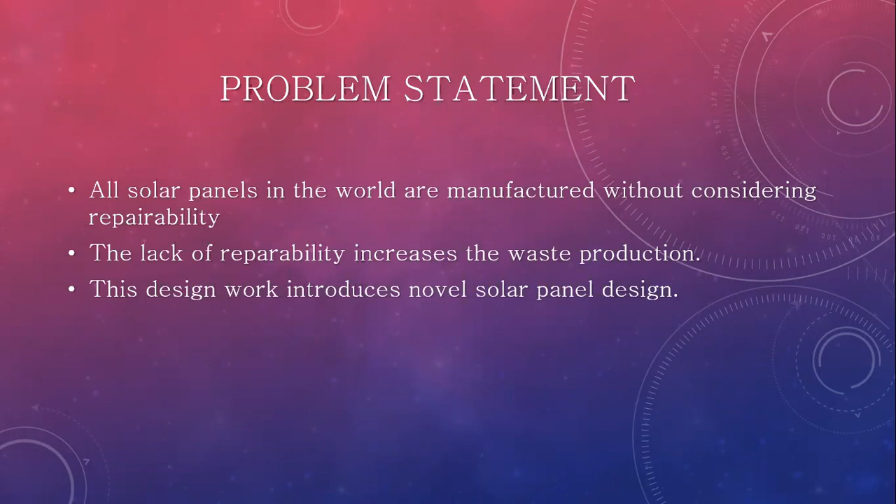We have tested our conventional modules under many conditions, and we found that the solar panels are not designed for any kind of repair mechanism. So we have to develop a new kind of solar module, which is financially more viable under certain conditions as compared with the typical modules.

Our methodology: testing, then designing, then prototyping. All module testing was conducted in the GCC lab. We started by testing the modules by applying a power test to measure the panel parameters, then applying a hail test with a different number of hail impacts to increase the damage, then detecting the cracks. After testing the panels, we found that a new design for a solar panel should be easy to replace in order to eliminate damaged parts of the system. We started with the modular designs and then improved the design over 2 prototypes.

I'll leave you with my colleague Abdul Malik Mukhaita to continue. Assalamu alaikum. Thank you, Muhammad. My name is Abdul Malik Mukhaita.

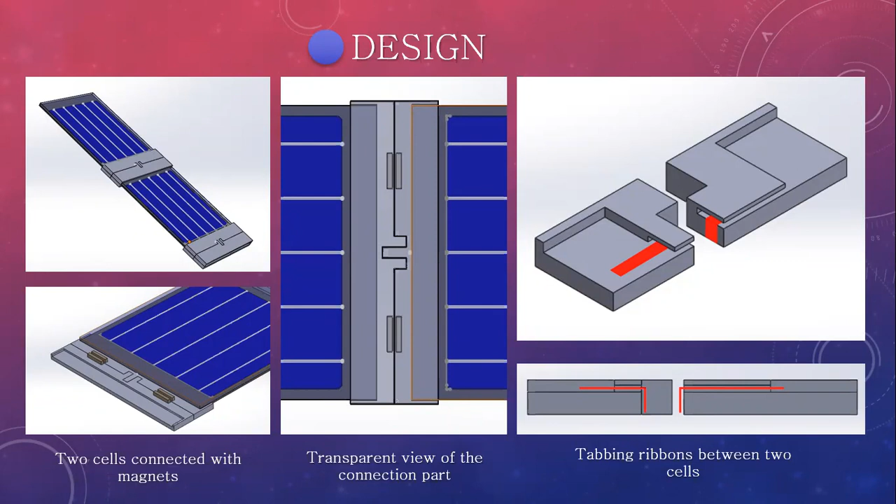The design includes 2 main elements: the cell unit and the connection element. The cell unit contains 3 parts: a top clear cover to allow radiation transmission, the solar cell, and at the bottom a thin rigid cover to hold the cell.

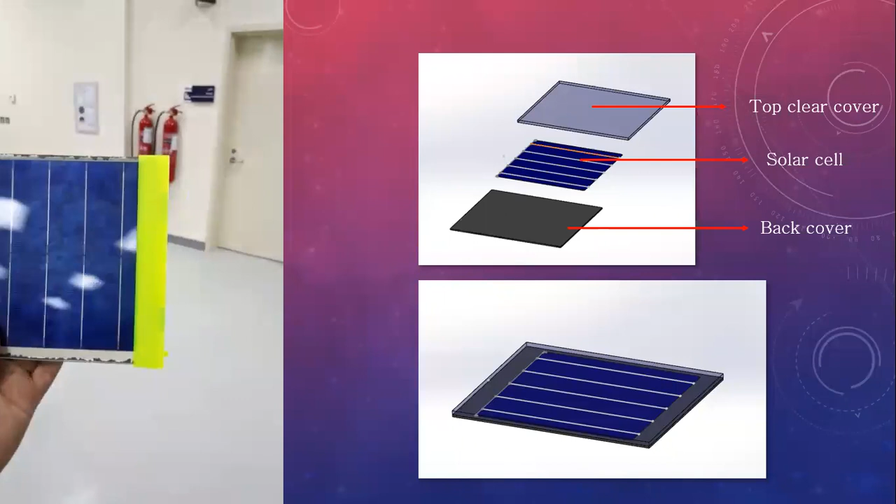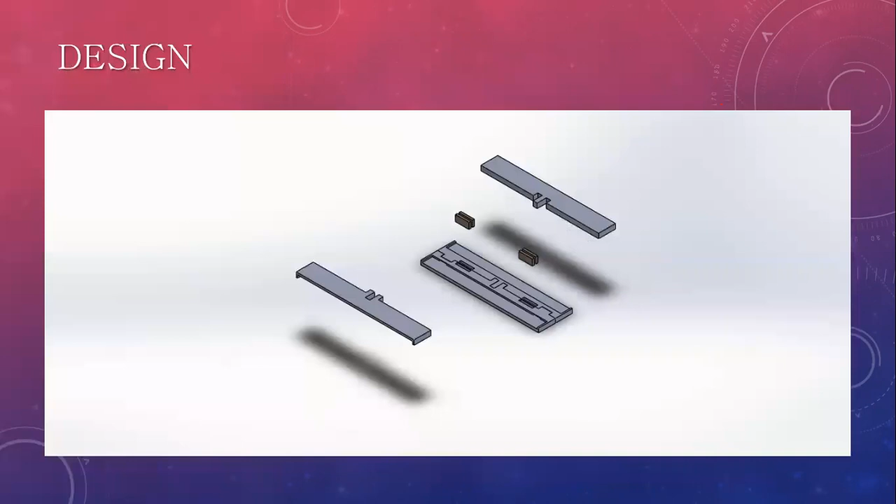The connection element consists of 2 parts that hold the cell assembly together from the top and bottom. Inside the connection, two neodymium magnets work as joining elements that hold 2 cells together. Between the 2 connection parts, a small notch is added for additional support against torque. The power transfer between cells happens through a tabbing ribbon that passes through a small groove in the connection parts.

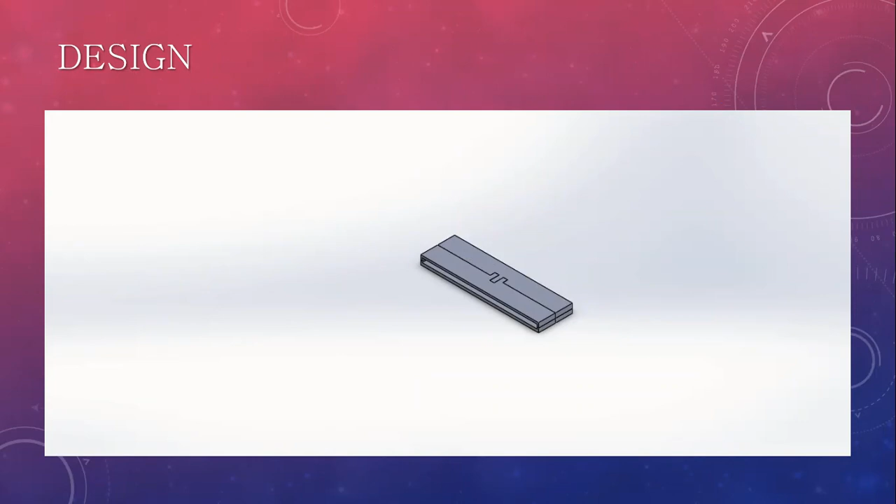The first prototype, the yellow one, faced a problem with a small notch designed to pass the ribbon to the next cell. We found that the notch was a weak point in the design and it broke easily if a small torque stress was applied to the parts. Keeping that in mind, the second generation was reinforced with a bigger notch and fitting element to overcome that stress. And I will leave you with my colleague Abdul Rahman.

To compare the lifespan of a typical solar system with a solar system based on a modular design, we need to take into consideration 3 main aspects: the material and cost, the damage cases that can affect the system, and the payback analysis.

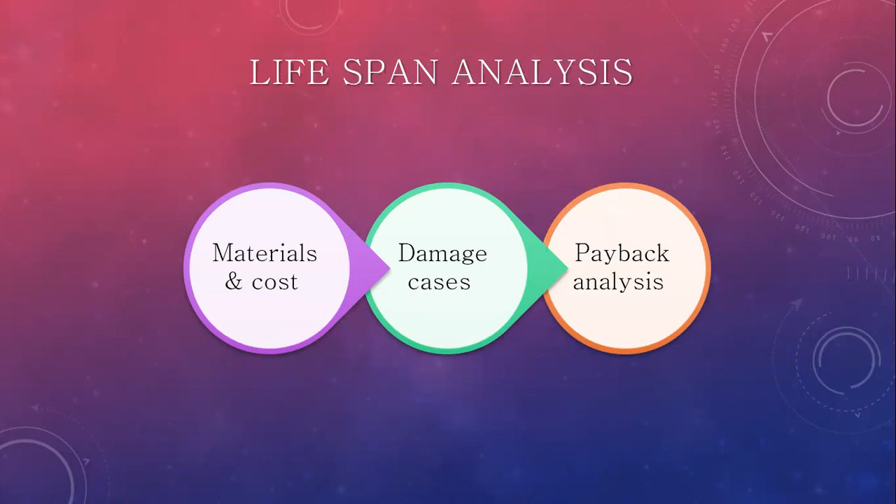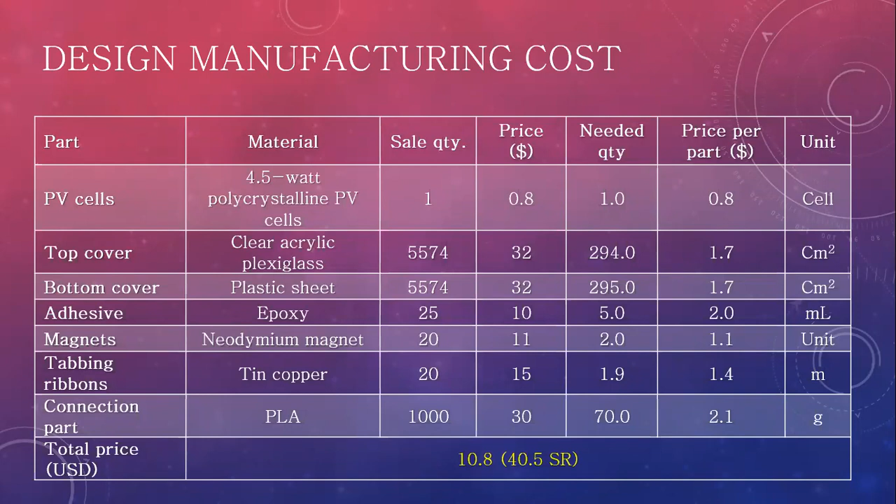Starting with the materials used to manufacture the design, most of the materials were locally available. The only material we needed to order online was the tabbing ribbons, as they were not locally available. After considering these materials, we found that the cost of 1 cell unit will be around $11, around 40 riyals, compared to conventional or typical solar modules, where 1 cell costs between $4 to $7 to make.

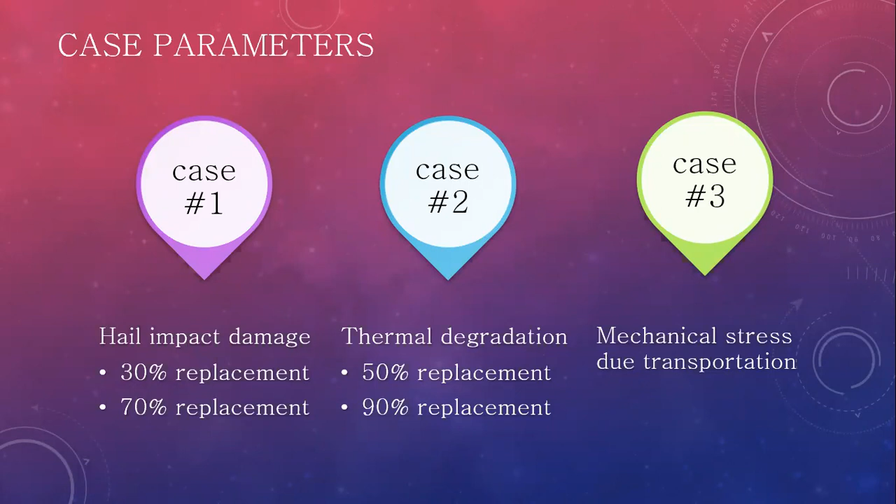We considered 3 cases that usually affect the performance of a solar system. First case is hail impact damage, with 30% system damage and 70% system damage. Second case is thermal degradation, with 50% system damage and 90% system damage. Last case is mechanical stress due to transportation between two locations, and this case is detailed in the report.

Starting with the first case, damage due to environmental factors such as hail impact. We considered a typical system that has 10 modules, each module containing 36 cells, to make an equivalent system based on a modular design, matching the power output of the system based on a typical design.

In case of 30% system damage, we will have 3 damaged modules with a total of 108 cells, and on the other hand, with a modular design, we will have only 3 cells damaged that need to be replaced. For a 70% system damage, we will have 7 modules damaged with a total of 252 cells to replace, compared to only 7 cells within a modular design.

The financial aspect of this case shows that we can save up to 95% in the replacement cost to restore the damage. Average solar module price is $250, compared to only $11 per unit for a modular design.

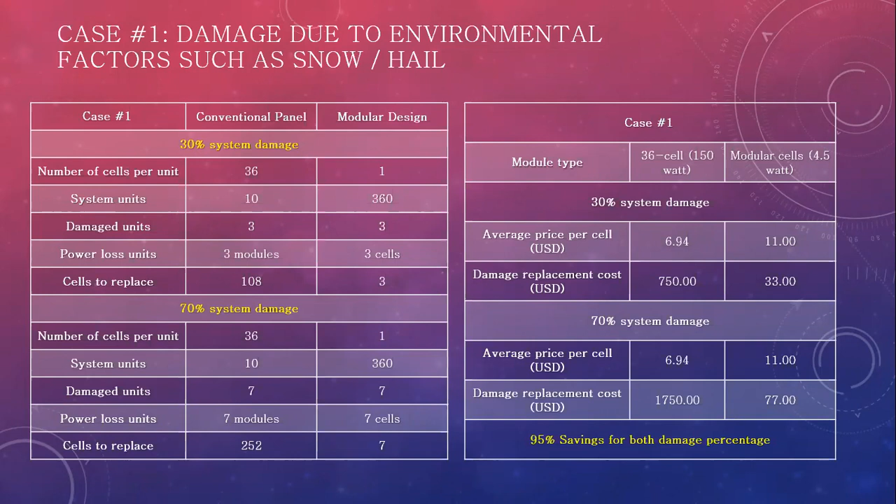The second case is thermal degradation. Thermal degradation is a condition that can affect cycling between high and low temperature during operating hours during the day, and in this condition, the solar cells, instead of generating electricity, dissipate the generated electricity in the form of heat.

In a 50% system damage, we will have a total of 5 modules damaged and a total of 180 cells damaged, compared to only 36 damaged in a modular design. In a 90% system damage, we will have a total of 9 modules that include 324 cells damaged and needing replacement, compared to only 36 cells that need to be replaced in a modular design.

We can see that both percentages, 50% and 90%, have 36 cells damaged in the modular design, but in this case the problem is that the damage is more scattered around the system.

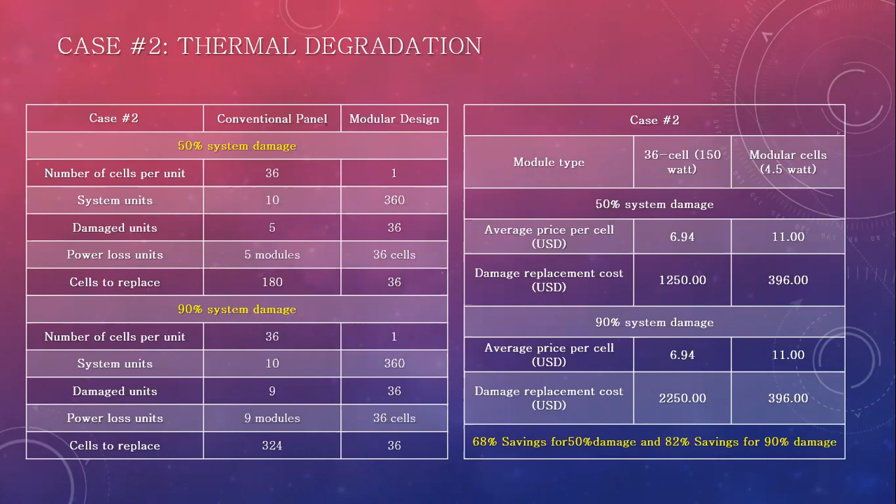The financial aspect of this case shows that we can save up to 68% in replacement cost for a 50% damaged system, and save up to 82% in replacement cost for a 90% damaged system.

Now we can summarize the main differences between modular and typical solar modules on three main aspects. The possible damage: the typical module will be completely damaged from one impact, whereas with the modular design, the impact will damage one area, and the damage will be contained to one cell area or disconnection.

The power loss on a typical module will be permanent and cannot be recovered. With the modular design, the power loss is temporary and can be recovered by replacing only the damaged part. The replacement pattern: in a typical design, we need to replace the whole panel, compared to only replacing the damaged parts on a modular design.

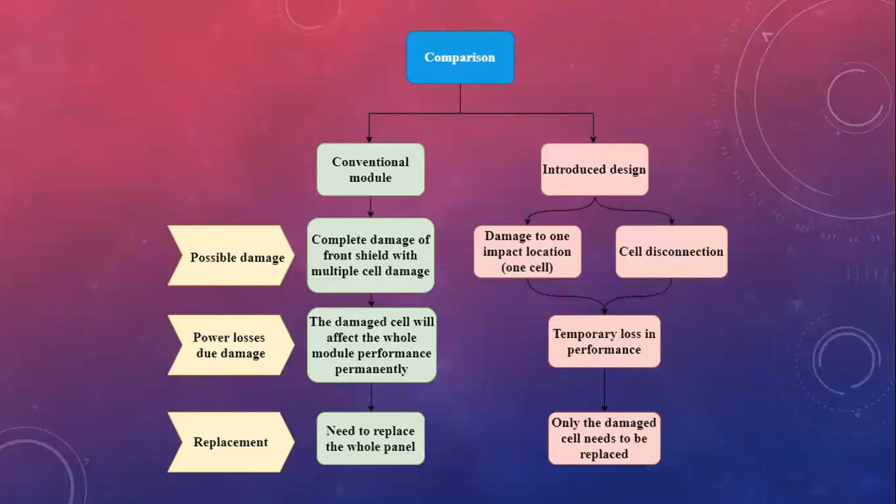In order to make both systems equivalent, we consider the following assumptions in the payback analysis. Both systems have the expected lifespan for a solar system, and the failure or damage will be introduced to the system at the midlife point, around the 12th year. Both systems will have the same power output, working hours, weather conditions, and billing rate. Finally, all costs other than the capital cost of the project are eliminated from this analysis.

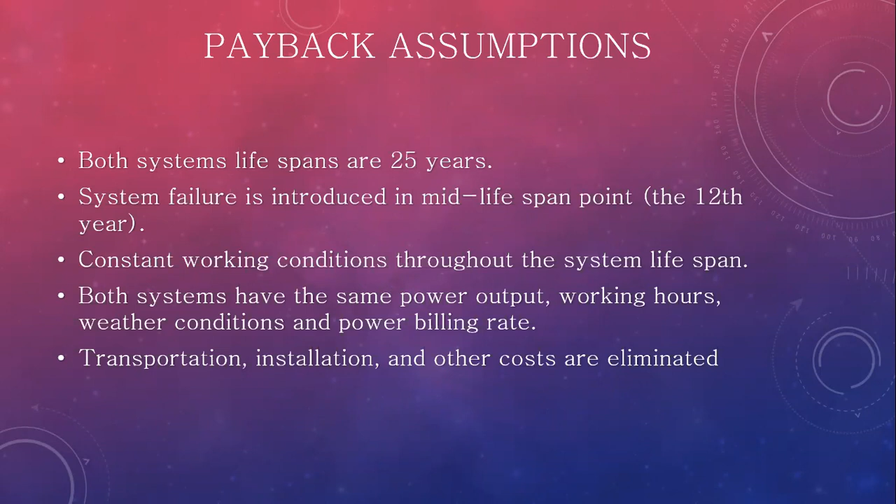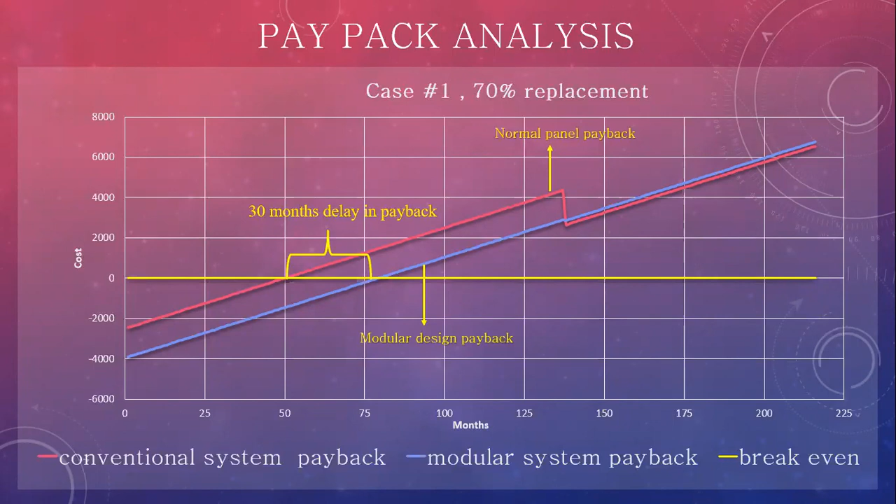In the first case, with hail impact damage and 70% replacement, we can see that the conventional system reaches the break-even point earlier than the modular system, due to the fact that the initial cost of a modular system is higher than a conventional system. But after introducing the damage into the system, we can see that the conventional system took a huge drop in order to recover from the losses and damage, compared to only a small drop for the modular system design. In this case, the modular system design is more feasible than the conventional design, because it introduces more profit during the following years after the damage.

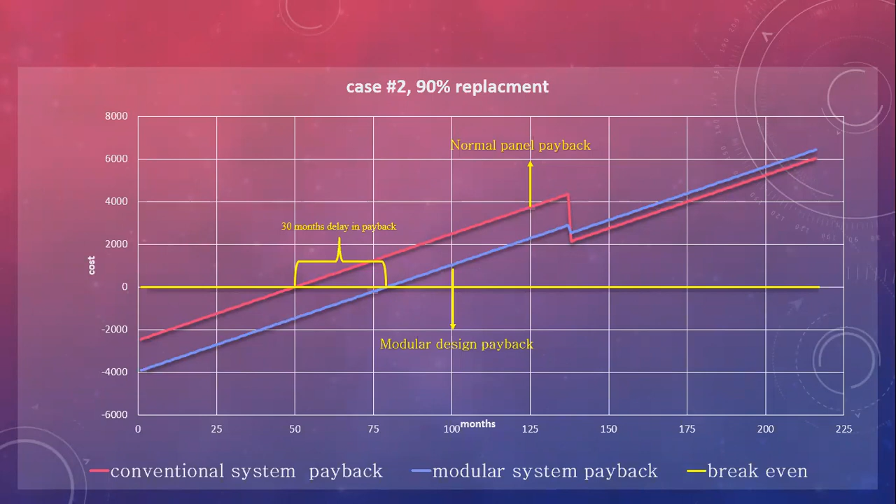The same applies for the second case, thermal degradation with 90% replacement cost. We can see that the conventional system reaches the break-even point earlier than the modular design, due to the difference in initial cost. But after introducing the damage to the system, the modular solar system recovers better than the conventional system, due to the low cost of replacement needed to recover from the damage.

And I will leave you with my colleague Mohammed Al-Qahtani to proceed with the conclusion.

Thank you, Abdurrahman.

In the conclusion, we introduce a new modular design for solar modules. The design is proved to control and reduce system damage, and it also reduces waste generation to the environment. The new design reduces the replacement cost, and with the reduced replacement cost, the insurance premium will be much lower. The modular design is financially more feasible in certain conditions compared with the conventional modules.

For future work, we need to conduct more experimentation, since we were not able to finish the experimental work due to COVID-19. Also, the selection of material is an important part of future work. And inshallah, we are aiming to apply for a US patent and submit a paper.

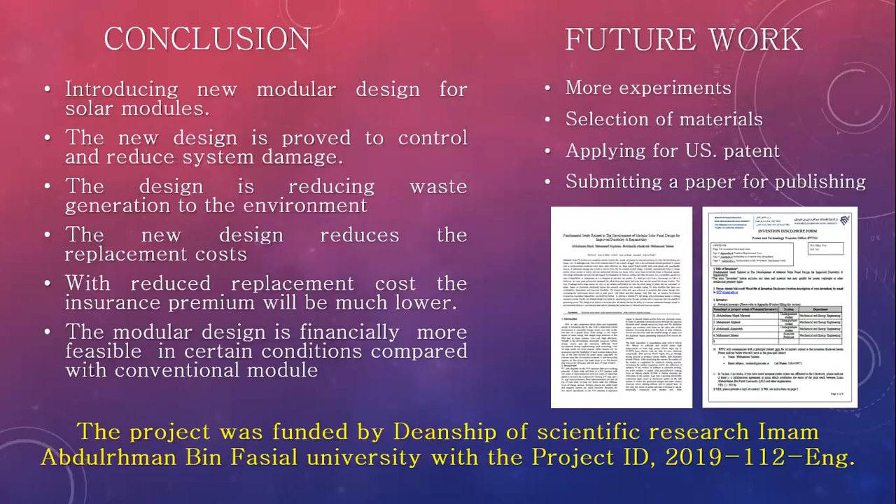This project was funded by the Deanship of Scientific Research, Imam Abdurrahman bin Faisal University, with project ID 2019-112, engineering. This project has been completed by satisfying all technical requirements stipulated by the university.

Finally, we want to express our thanks to the Deanship of Scientific Research and Imam Abdurrahman bin Faisal University, to Dr. Fahd Al-Amri, who helped us always, to Dr. Nasser Hariri, who guided us during the prototyping process, to Dr. Umar Siddiqui for his valuable advice, to Engineer Ijlal for helping us during the experimentation, and we were hosted by the DCC Lab. We would like to express our thanks, especially to Engineer Nawaf Al-Ahmed and Engineer Firas Al-Dosi. Thank you.

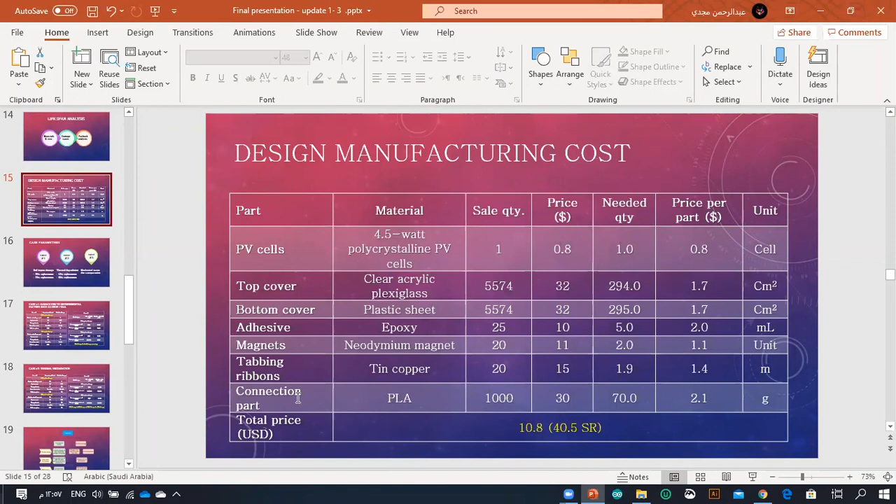Sorry for contributing before the jury members, but I will join also the comment of Dr. Nasser by going to slide number 21. Before everything, I would like to thank Majdi and all the group members for the great job and great work done during this senior design project, and thanks to their advisor, Dr. Salim.

Regarding the question, in the y-axis what I am seeing is labeled cost, but I think this is actually the cumulated cash flow cost. It shouldn't just say cost, because it makes the figure confusing, as happened with Dr. Nasser, because once you label it as cumulated cash flow cost, you can read the figure better and judge it better. My question is, I can see from this figure that the payback time for the conventional panel is exactly 50 or 51 months, however for the modular design the payback time is about 76 months, meaning the payback time for the conventional panel is shorter than for the modular design. This is my first comment.

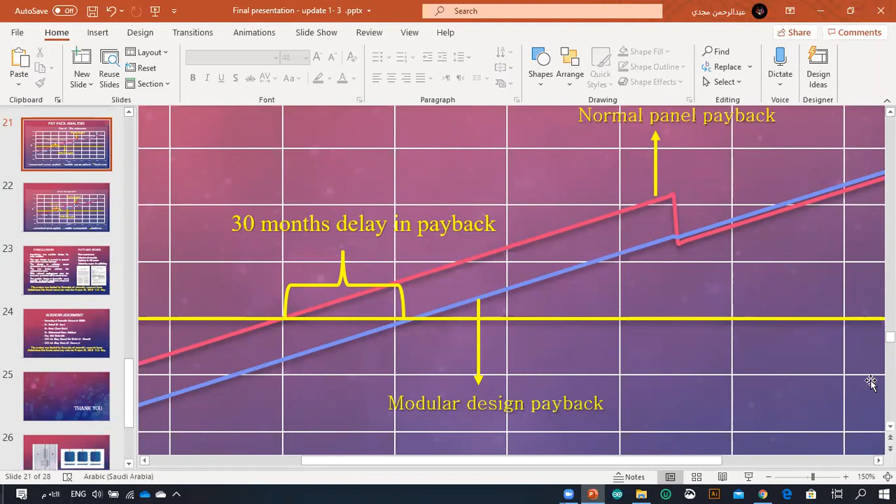Yes, again, thanks for all the members. I have my last question here. It's a very interesting project and very interesting design that came up. So let's go to the picture or the slide for the design itself.

Maybe slide 8. Yes. So my question is: is there any wastage or losses in the overall generated electrical power compared to the traditional modules? In other words, is there any waste in the overall area of the solar cells due to the additional gaps introduced in your new design? If you look at the normal PV panel, solar cells are very close to each other, and we don't have that introduced gap due to this design.

So now, as you build a module that consists of many cells, and compare your new design with the same area of your traditional PV panel, what will be the losses in power and electrical power of your new design? That will also come back to your payback chart again and affect it. So how much does that introduced wastage of area between the cells affect the overall power?

That's another criteria that can be investigated in the future of this project. But I just want to highlight it, and if you have something to comment on this, that would be great.

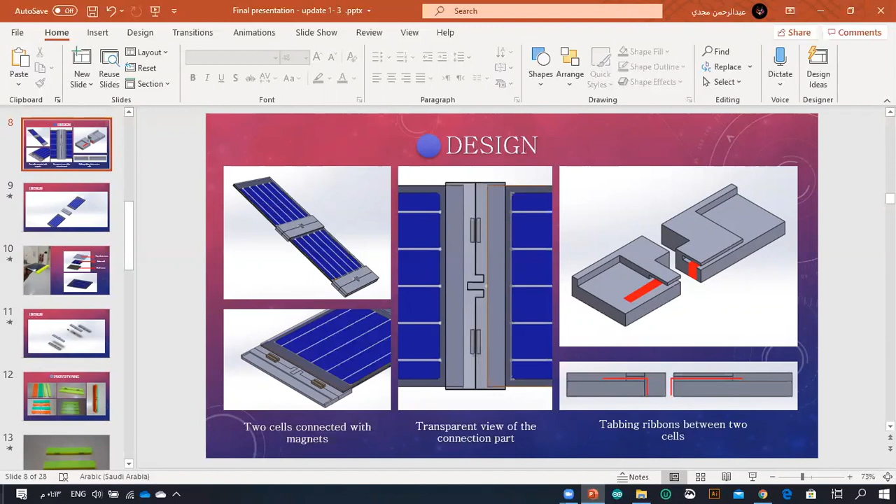the fact that we were not able to be on campus anymore. Great. My last comment is that you might need to compare the output of the electrical power of the new design after you optimize it and reduce that area with the traditional one, and then you can see how efficient your system is compared to the traditional one. We had that in plan, but we couldn't proceed with it due to the current circumstances.

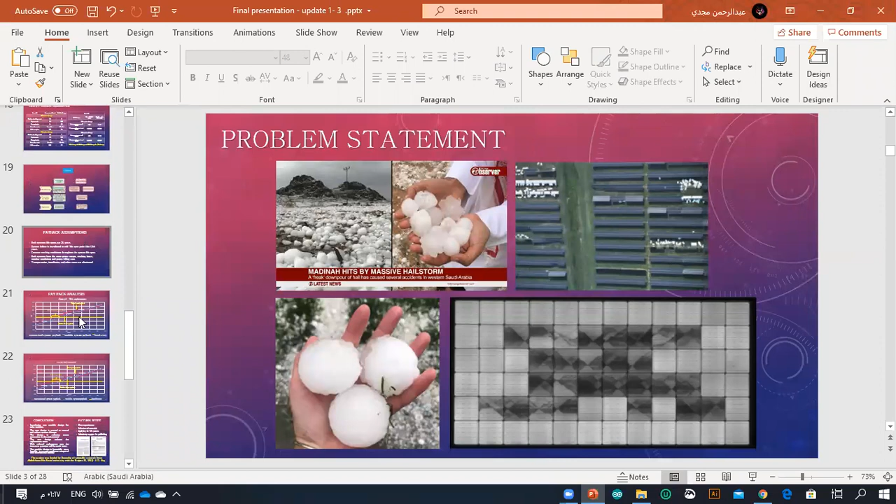Okay, my question was that you have introduced the damage only once in the life of the solar panel, right? Yes, that is correct. One-time damage. So if your damage happens more than once—for example, after repair or after replacement it happens again—then if you introduce more than one damage point, it will be more prominent how your system is better compared to the conventional system. Yeah, that's a very valuable point.

It's exactly what he's trying to say. Let me explain: in your case, you have introduced only one damage, and shown that your modular panel becomes more economically feasible compared to the other one. Imagine that on the same site there is a second hailstorm after one month—then again, in the case of a traditional panel you will have to replace the whole site, but in your case, again, very minimal damage. So when you have multiple damages on the same site, your solution becomes much more economically effective. In terms of larger, more frequent damage cycles, you become much better. That's what he's trying to say. Correct, sir? Correct, Dr. Zahir? Yeah, exactly. Thank you, Doctor.

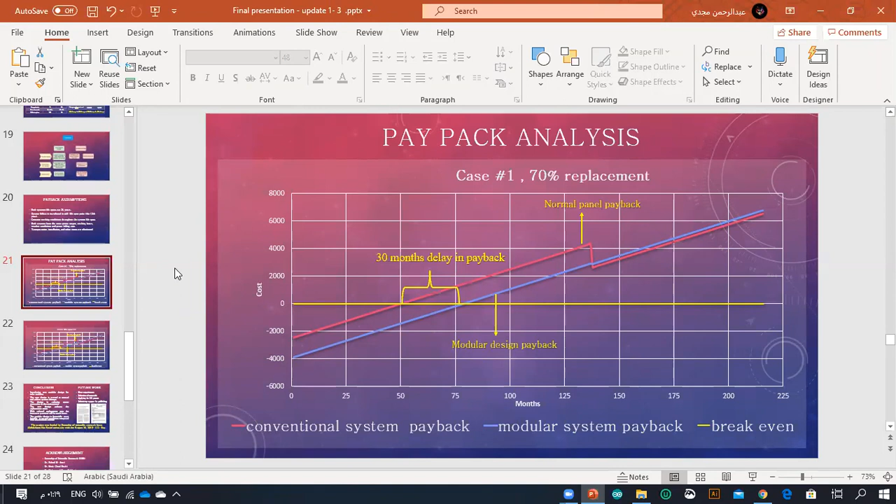Okay, thank you, Dr. Salim. First of all, this is a good project and the students have done a great job. But again, my concern is regarding what Dr. Nasser already mentioned about the power issues.

Students have mentioned that they don't have time to do the power calculations due to COVID-19, since they are not going to the university. But what about the initial calculations? In one of the slides you mentioned that with some crack the efficiency is decreased by 30%. Have you calculated how big the crack is, and according to that, how much the efficiency is decreasing? Did you do any analysis in the initial phase of when the efficiency actually decreases due to the damage?

We actually, in the beginning of this semester, conducted experimental work in the GCC lab where we took real panels and hit them with bolts to introduce damage to the module. Here we can see that with an increased number of hits, the power loss increases. These are the experiments that we conducted.

I will leave the floor for Muhammad if he can add to that. For the 30%, we were participating in some webinars, and there is a company evaluating the micro cracks outcomes. I meant, when there are micro cracks, how big is the decrease in efficiency? The expert was saying that it depends on the size of the crack, and it can reach up to 33%.

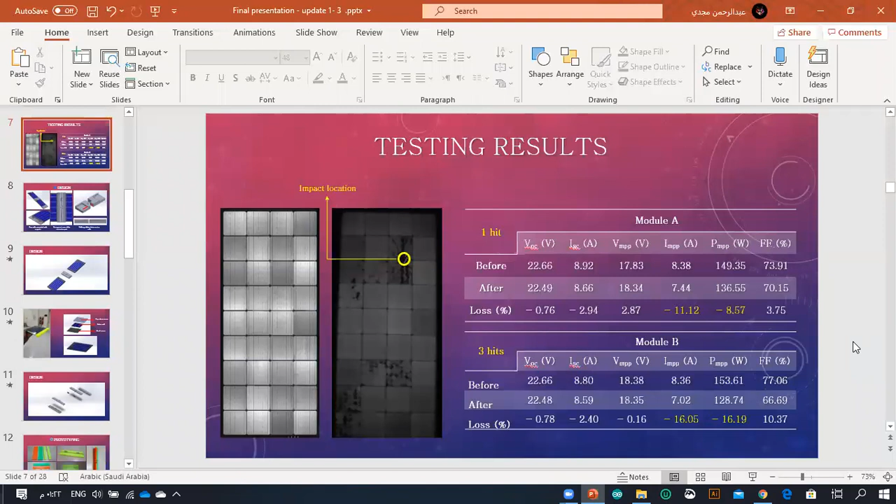The fill factor compares... Majdi, yes, please doctor, explain the whole table so that all the audience is clear, since it may not be clear to everyone. Make it bigger size and explain the whole table, please.

Sure. In the first table, the VOC, the open circuit voltage, and the short circuit current are the voltage and current generated from the panel with no load on it. In the other columns, the maximum point voltage and maximum point current are the voltage and current at the maximum power point that the panel generates, and multiplying these two values generates the maximum power point.

The fill factor is a term used to describe the performance of a PV panel by telling how much energy the panel can generate from the maximum possible energy that can be generated. This factor is a ratio between the maximum power divided by the maximum possible power, which is the multiplication of the open circuit voltage and the short circuit current.

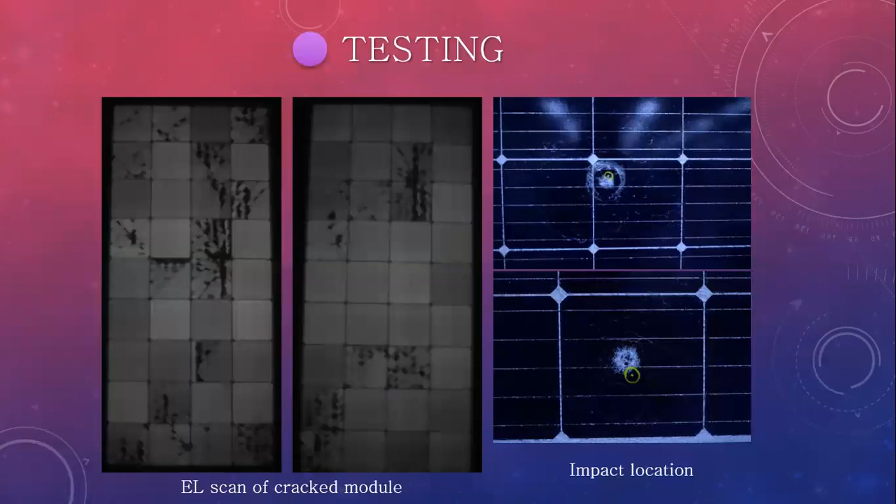This is why we introduced our design. In case the cell takes a hit at this part, there is no physical path for the crack or for the damage to proceed to other cells connected in the system. So the initial problem of this research was that there was no way we could repair a damaged solar module. This is why we introduced this design.

Okay, fine. So you have only done this cost analysis for your design, not the power analysis, right? Yes, we couldn't make the power analysis. Okay, but that is actually very important - you should do the power analysis for your design as well.

Yes, Doctor, it wasn't the plan, but for this design, maybe for future work - because if, for example, your design is not as efficient as the regular design, then obviously, if you give this design for no cost, nobody will buy this design, right? Not if it is providing that much less power.

So before doing the cost analysis, the first thing is to do the power and efficiency analysis for the design. If that is providing that much power, or for example 75% of the power, or 50% of the power, right?

Then you can say, okay, this cost is low, and even though it is providing 75% of the power as compared to the regular design, or 50% of the power compared to the regular design, it is providing less power, that's why the cost is also low. Or if it is providing 100% of the regular power, the same amount of power, and the cost is low, that would be the ideal case.